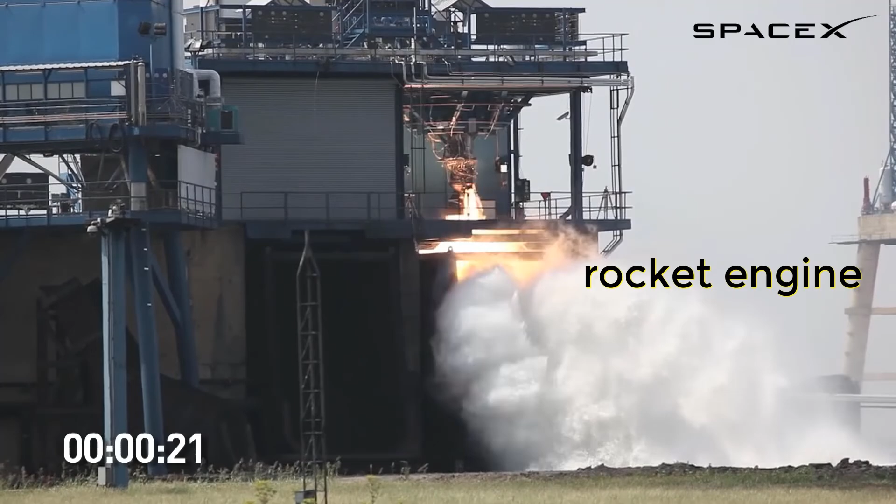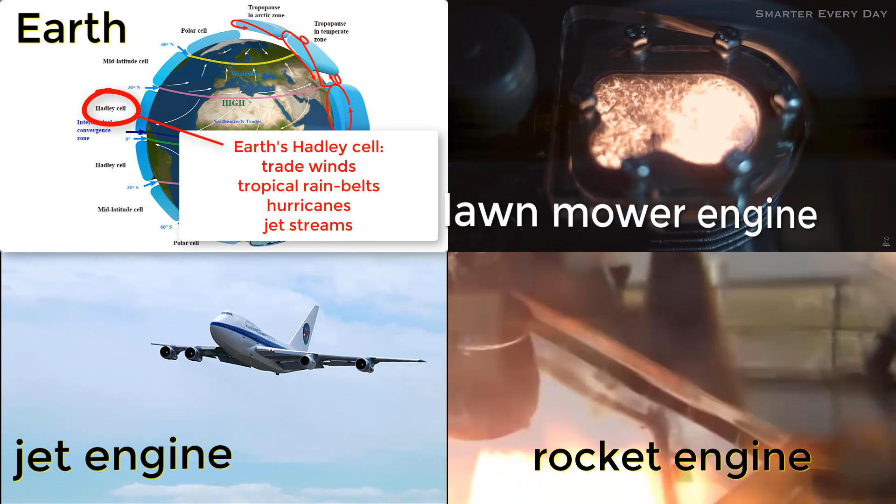The sources of the heat that power the heat engines are critically important. They fall into two basic categories, non-renewable and renewable. Non-renewable sources are removed from the earth, for example, coal, petroleum, and natural gas, and burned to create heat. The negative health and environmental impact of using non-renewable energy are obvious.

Renewable sources are not removed from the earth and are not burned. For example, solar, hydro, and wind energy.

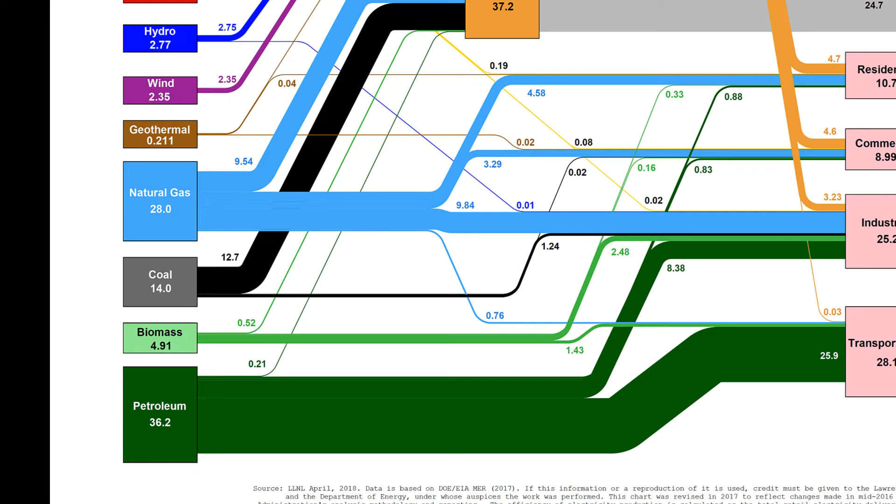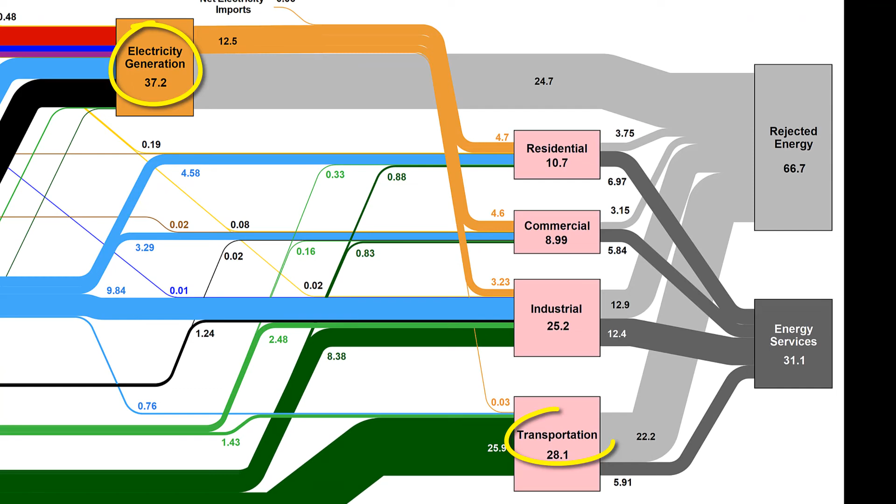This really colorful graph from the Lawrence Livermore National Laboratory might be my favorite chart ever. Notice that the three thickest lines represent non-renewable fossil fuel. The heat they produce when burned is primarily used to generate electricity, to power vehicles, to warm buildings, and for various industrial processes. Also notice that renewable energy sources such as solar, hydro, and wind make up about 6% of the US's total energy supply. This number is growing, but a lot more science and engineering is needed.

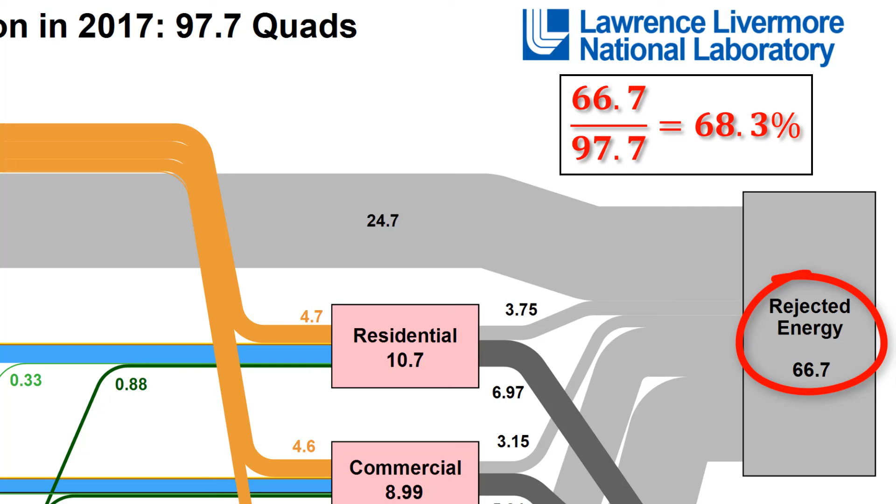One really interesting number to look at is the amount of rejected energy, which in 2017 was approximately 68% of the total. Think about it. More than two thirds of the energy generated in the United States in 2017 was lost, mostly in the form of wasted heat. Some heat must be lost according to the second law of thermodynamics, but not two thirds of it.

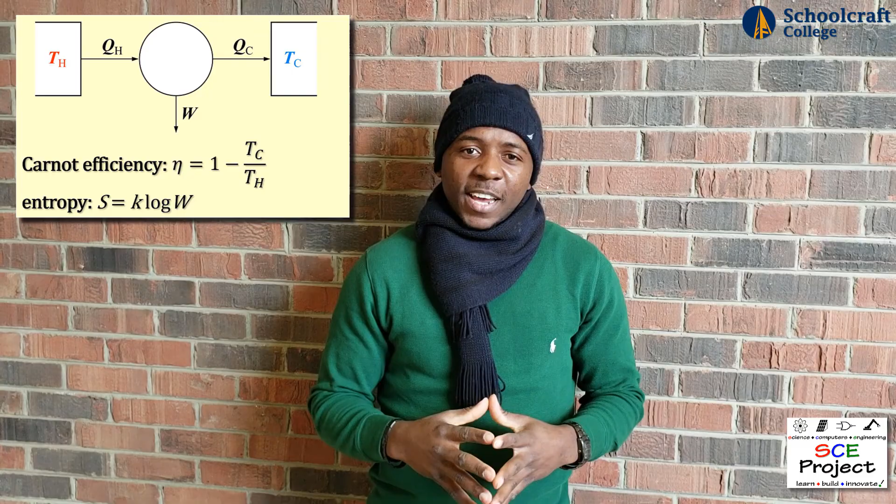This is where scientists and engineers come in. We need to make energy production and consumption cleaner and more efficient. We also need to help figure out a way to overcome the current barriers to widespread clean energy adoption.

This is why I'm showcasing Stirling engines. They are simple, have some interesting commercial applications, run on air, produce zero emissions, and provide a great window into a lot of science that is common to all heat engines.

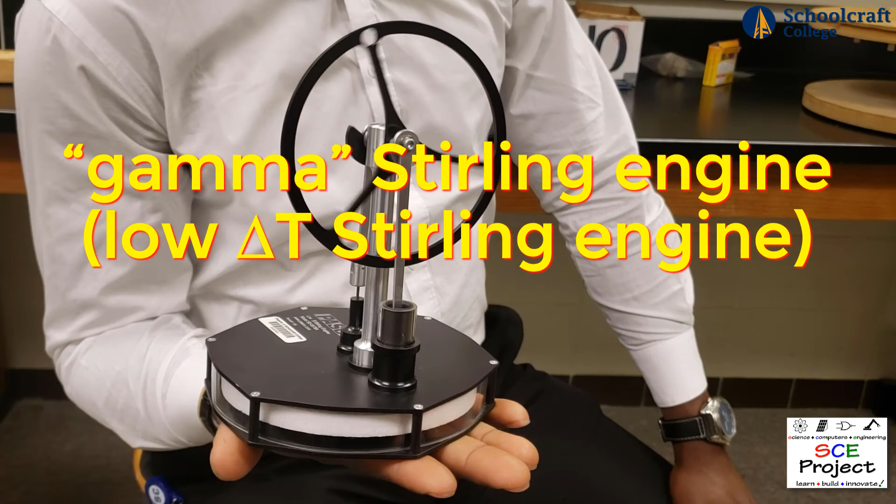This is a gamma-type Stirling engine, which is also known as a low delta T Stirling engine. Delta means difference and T refers to the temperature, so this engine runs because of a really small temperature difference. In this case, the temperature difference between my hand and the surrounding air.

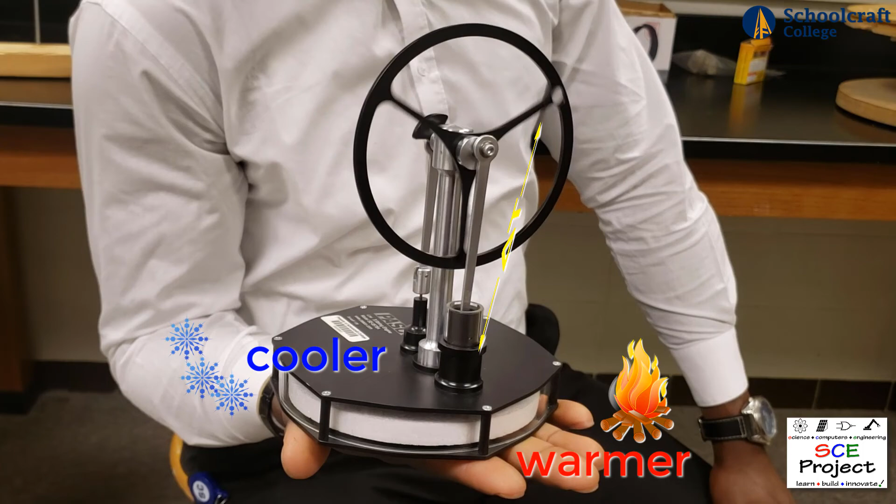A gamma-type Stirling engine has two cylinders. This is the power piston, which fits snugly within this cylinder, and this is the loose-fitting displacer, which repetitively circulates the air inside. The power piston and displacer share a common volume of air.

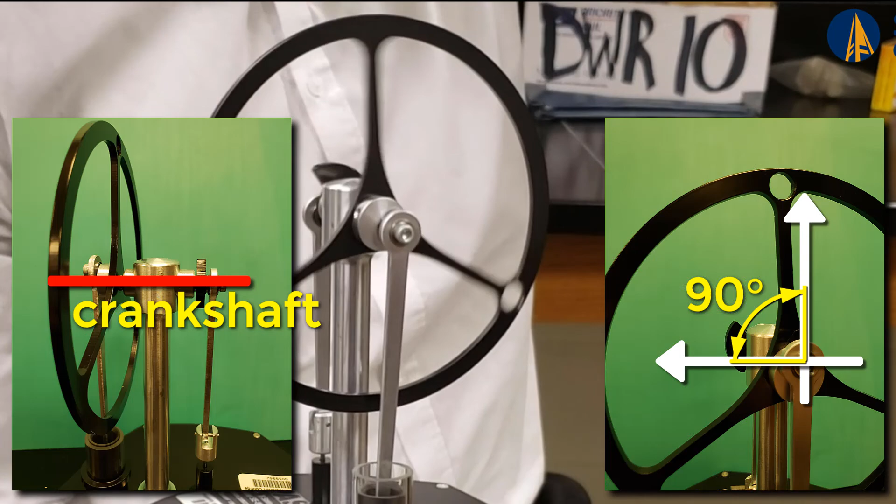They are connected 90 degrees out of phase with each other via a crankshaft with a flywheel. The flywheel's rotational inertia makes the engine run smoothly. Without it, there would be sharp power spikes followed by weak intervals.

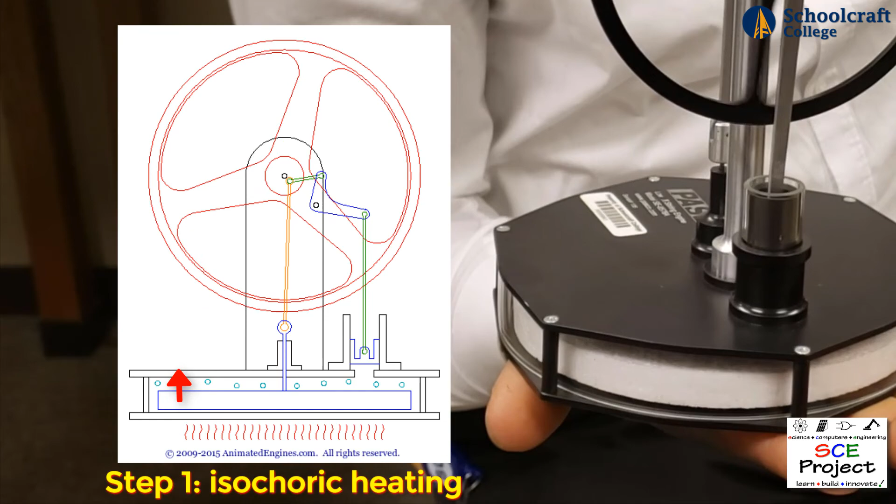Let's go through each step in one cycle. Step 1: the displacer rises, forcing air to the warm heat exchanger at the bottom. This is called isochoric heating. Step 2: heat enters the air, causing it to expand.

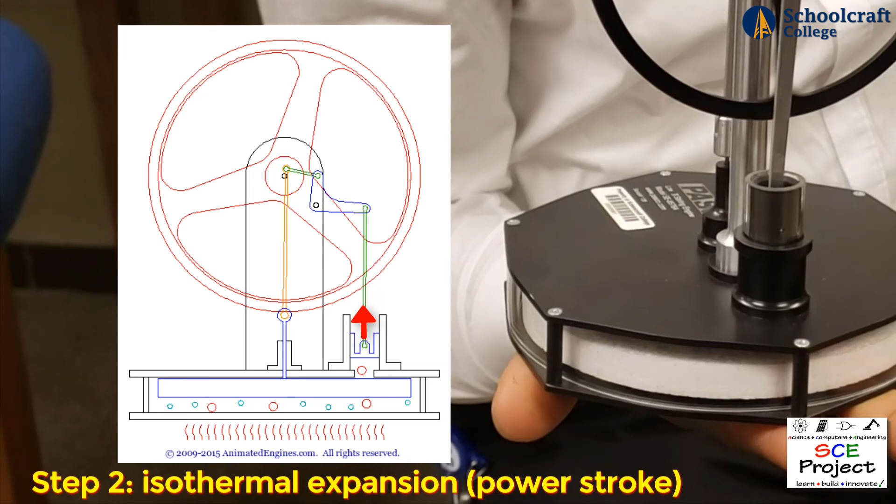The power piston moves upward. This is called isothermal expansion. This is also the power stroke. It is where the engine is doing real work for us.

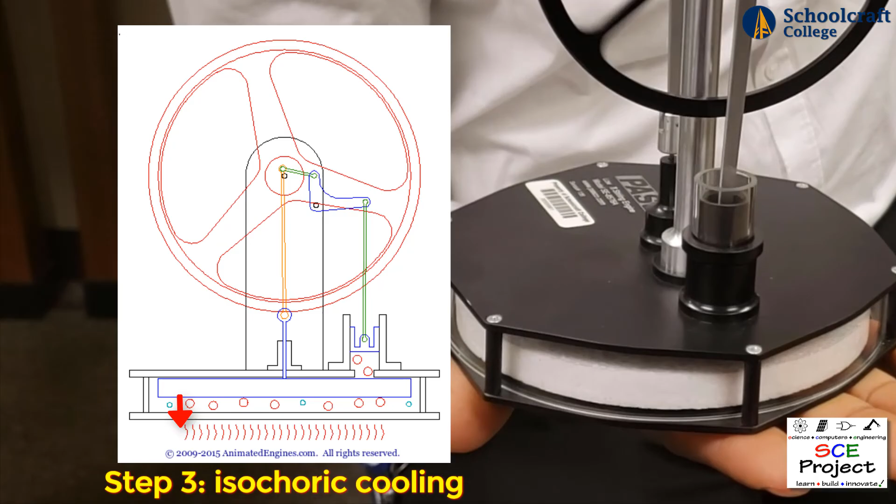Step 3: the displacer descends, forcing the warm air to the cold heat exchanger at the top. This is called isochoric cooling. Step 4: heat leaves the air, causing it to contract.

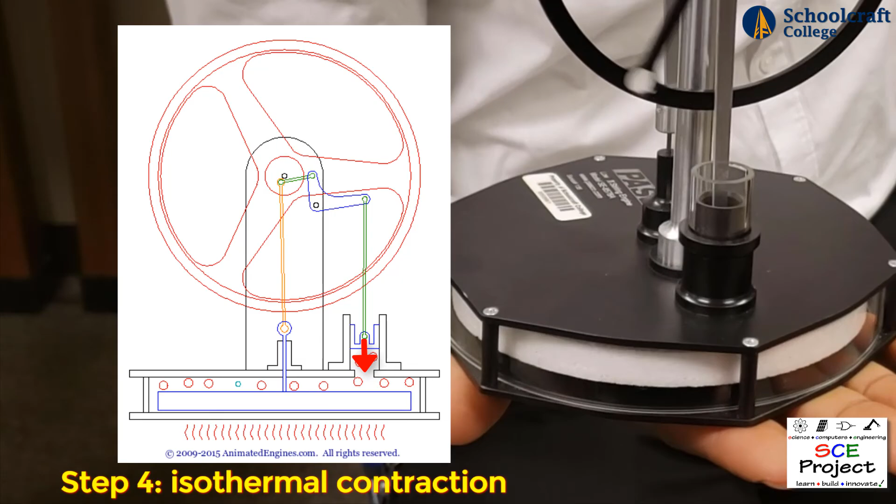The power piston moves downward. This is called isothermal contraction. The engine is back to where it started.

This flywheel plays a critical role. Its rotational inertia helps the engine move from one step to the next and provides a smoothing influence. Without it, the engine will run much rougher. That's it. This cycle is repeated over and over again.

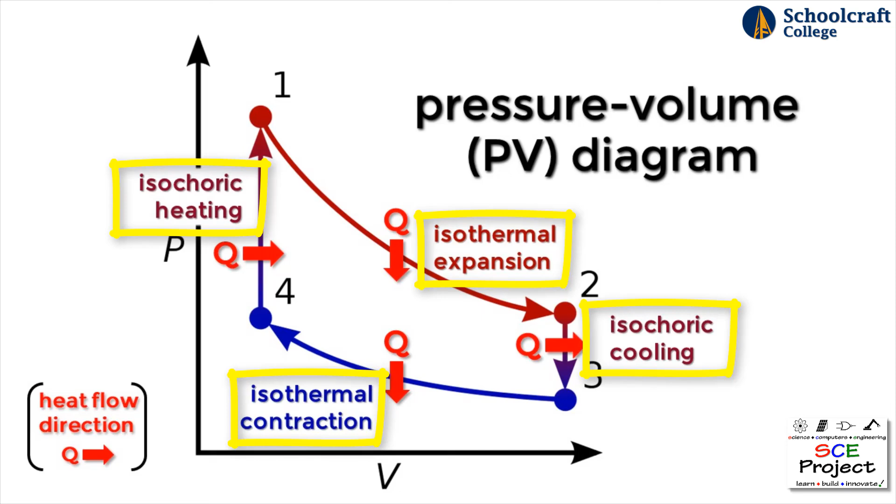Here's my Stirling engine running on top of a beaker of warm water. Notice that it is spinning clockwise. I'm measuring its revolutions per minute with this motion sensor.

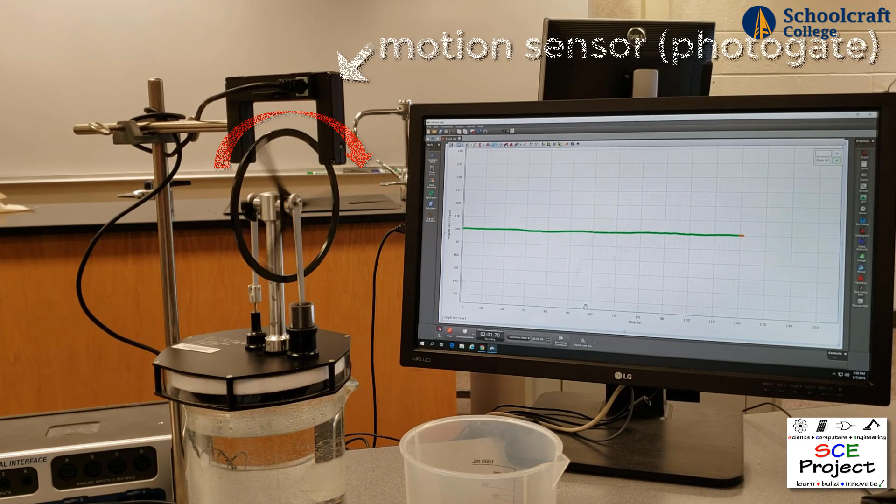Watch what happens when I put some ice cubes on the top plate. All of a sudden, the temperature difference increases, and so does my engine's RPM.

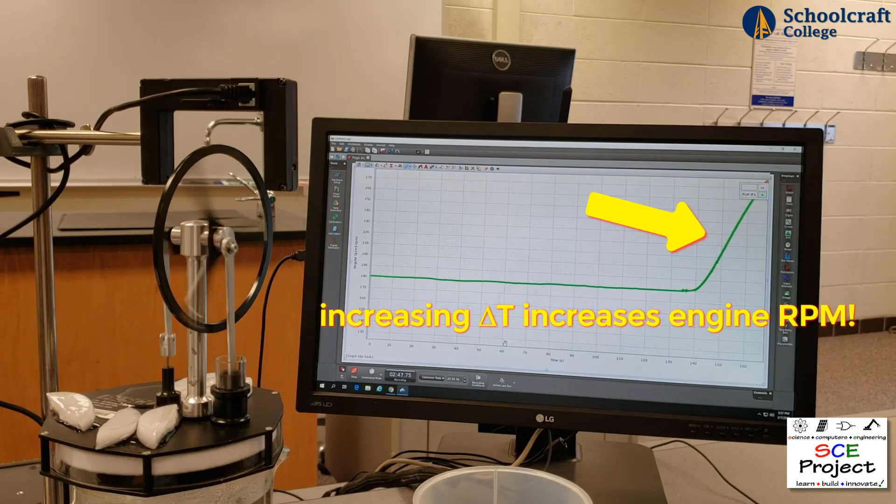Now watch what happens when I reverse things by making the bottom plate the cooler heat exchanger by placing the engine on this plate of snow. Instead of spinning clockwise, it is now spinning counterclockwise.

Stirling engines have been around since 1816 and are now gaining interest as part of the sustainable energy movement. They can be powered by many different clean heat sources, like passive solar and geothermal. They can also capture waste heat from automobiles, homes, and industrial processes.

The more we learn about the science and engineering of heat engines, the more we can make them cleaner and more efficient. The Stirling engine provides a great learning opportunity in this area. I hope you enjoyed this video and thanks for watching.